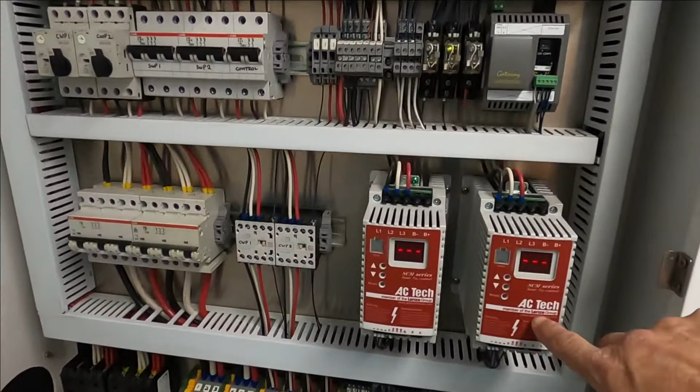Do a little upgrade to the system monitoring. Currently what it does is there are seawater pumps. See, there are seawater pump VFDs that control the speed of the seawater pumps, so it regulates the head pressure, or the high pressure if you will.

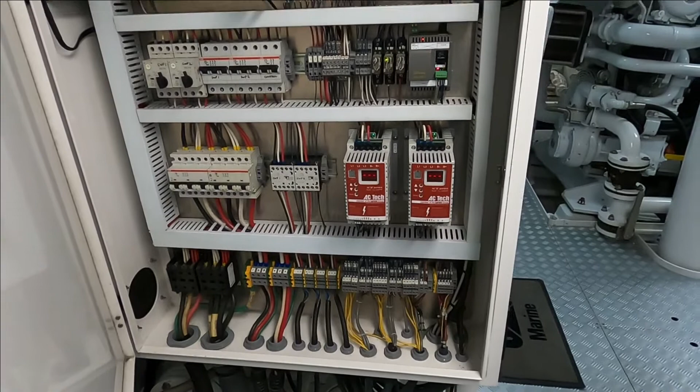So what I'm going to do is, well, the problem is if these things fault out for any reason, the system doesn't know it, and then it'll fault out on high pressure. So what I'm going to do is connect these up to the PLC to give us a warning to shut the system down as necessary.

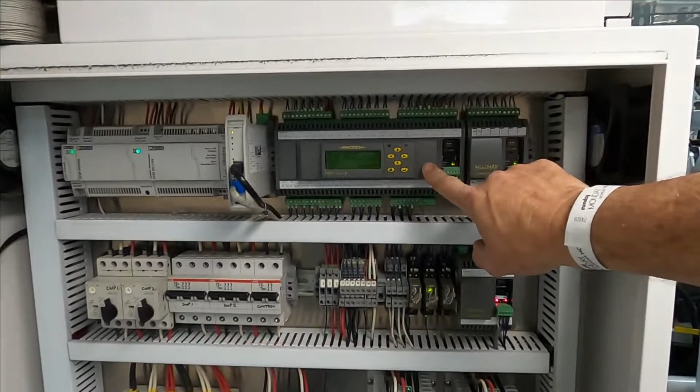So we're going to do an update on the chiller control system here. These are seawater pump VFDs. What they do is take a signal from the programmable logic controller, the PLC, that is monitoring the pressures of the compressors. When the pressure goes up, the seawater pump speed goes up. When the pressure goes down, the seawater pump speed goes down. Because we want to regulate it at a certain pressure to give us a certain temperature of the refrigerant.

Problem here is VFDs sometimes have an issue and they will fault out. So what I'm going to do is these fault relays, here's a fault relay output, fault relay output. I'm going to hook them up. See, we have a couple empty spaces right here. So when a seawater pump faults out, the PLC notices that and will shut that compressor off instead of shutting off on high pressure.

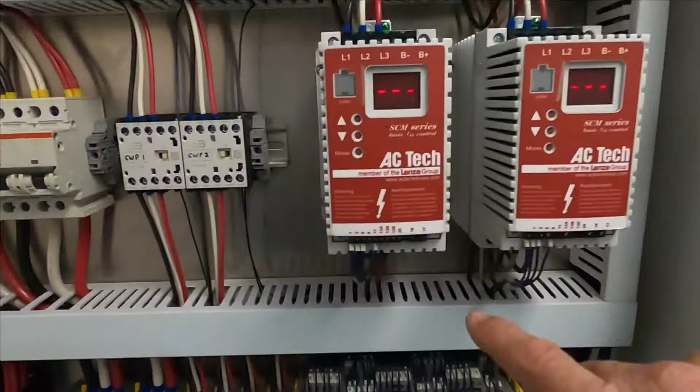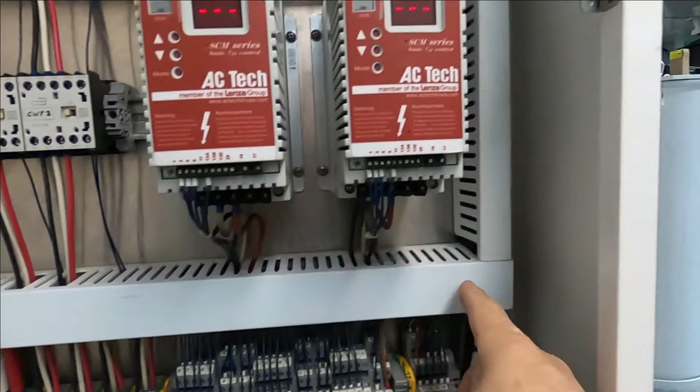So what I'm going to do is, from these two, I've got to program them to energize that relay, and run wires along the cable chase here and into the PLC.

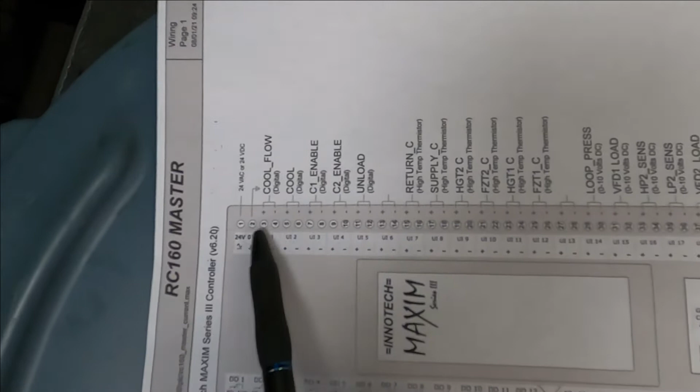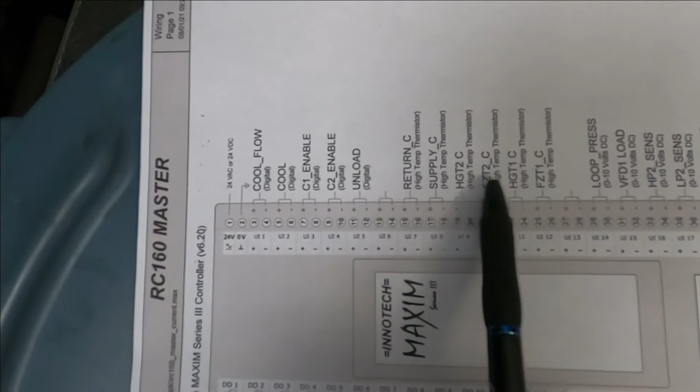So here's the old configuration. We've got inputs all along here. As you can see, we have an empty one here and an empty one there. Well, the way this system works, I can't just put them there and there. I have to move all of these over to one spot. And that will open up these two. Or if that one's already open, it'll open up this one.

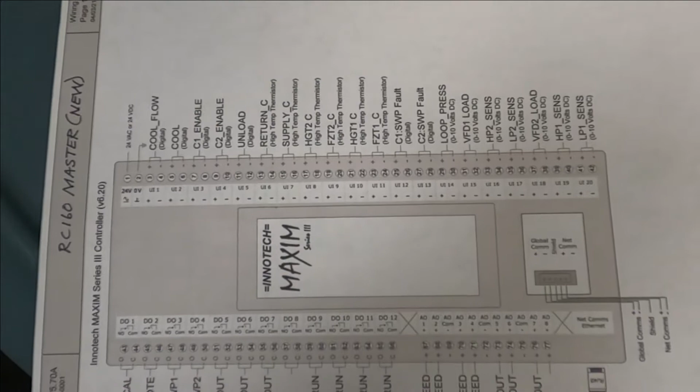Here is the new configuration. As you can see right here, it's the seawater pump monitoring. It's just the way this Maxim system works. So it will require a little programming change, which has already been done. I just need to upload it into the PLC.

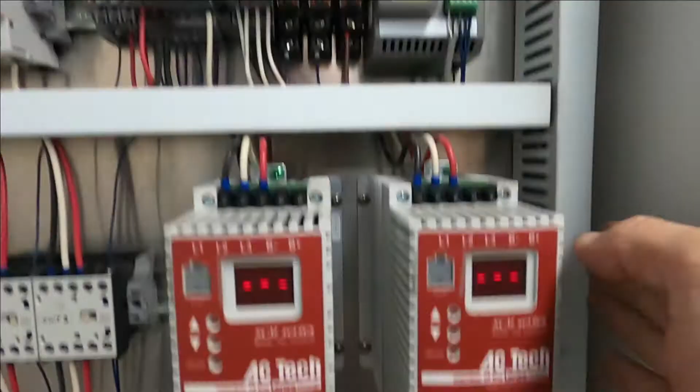Alright, so I have these two wires ready to terminate onto those two terminals. I have these two wires ready to terminate on those two. I ran them up that wire chase, and they are coming out pretty much from where I need them. Alright, so I have those two terminated with ferrules. I have those two terminated with ferrules. Covers back on for those two. In theory, I can put that cover on.

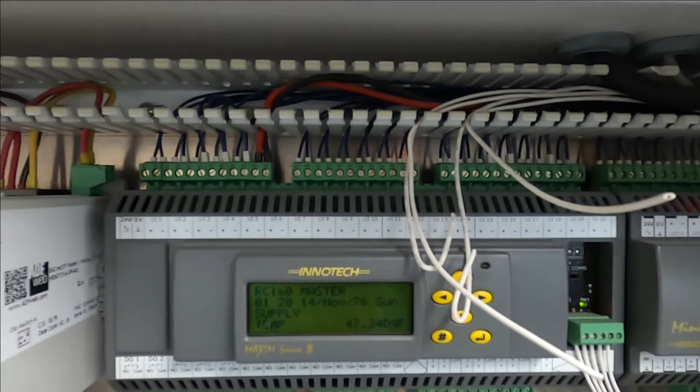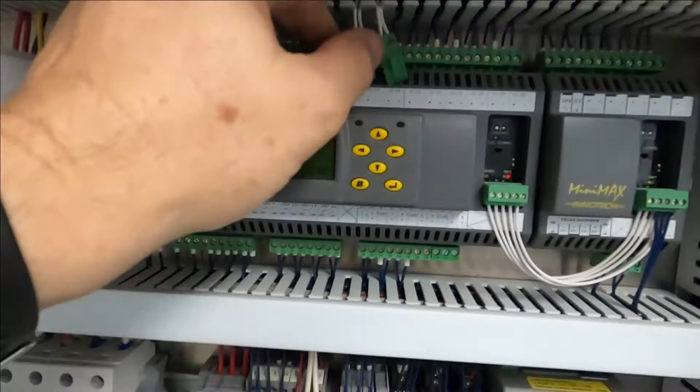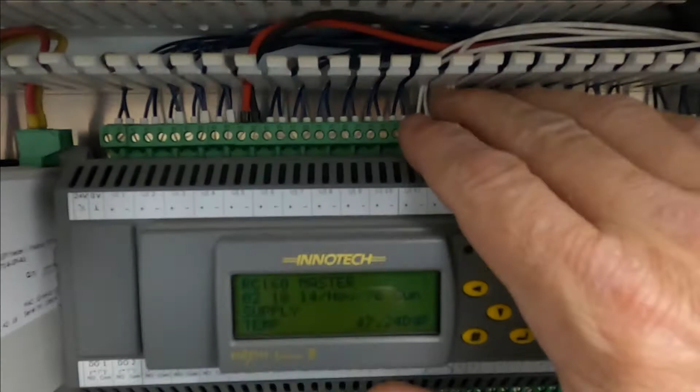Problem is, I need two of those terminal blocks. See, there and there. I need to go back to the shop and get some. Bummer. I moved all those over as I said I needed to. Now I've just got to put these two in. Okay, so I did. I moved all the ones over as I needed to. Remember, there was an empty spot right there. So I moved those 6 over, plugged those two guys in.

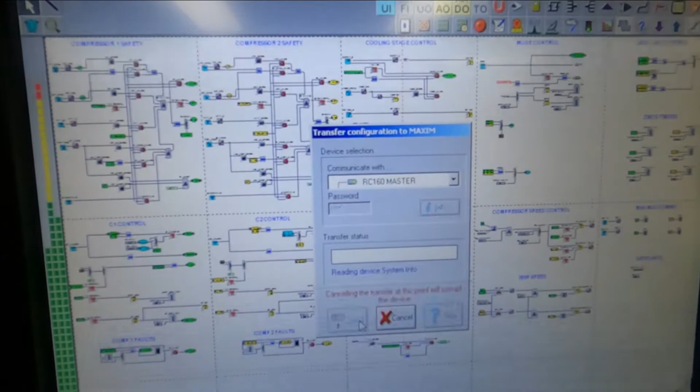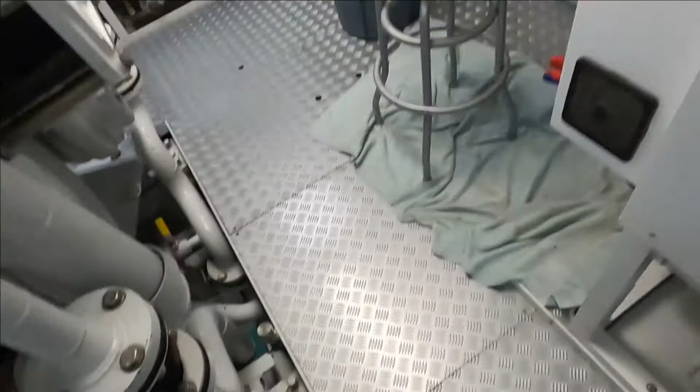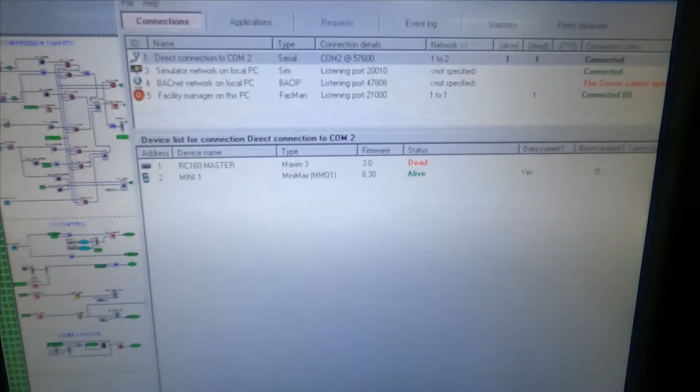Now it's time to upload the new config. So we come here to communicate, transfer to Maxim. Already have the password in. Send. Okay, so now it's writing data to the device. Alright, successful. Hit OK. Reset. OK. OK. Now, let's see, we got halted. Come on. There we go. Now it's alive. It's alive. Let's get that out of the way.

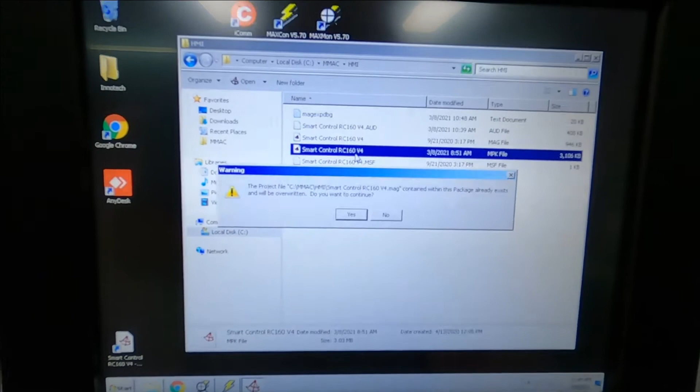Now we need to, here, let's see. HMI. Yep, I want to overwrite. Yes, I want to do all that. Now it's going to tell me I couldn't, which is fine. System is firing up. Chill water pump just fired up. Just make sure everything's good. Setting. Pump 2. Alright, I already transferred the run times.

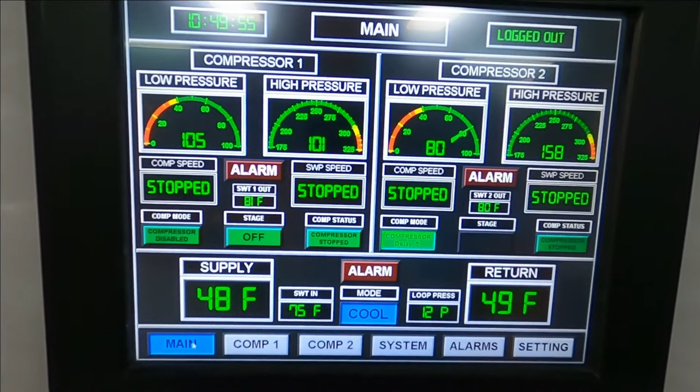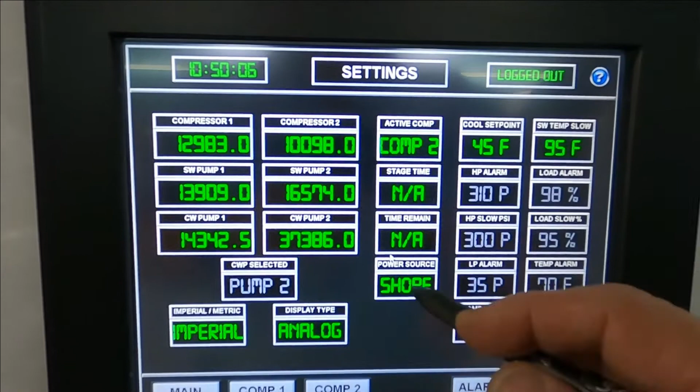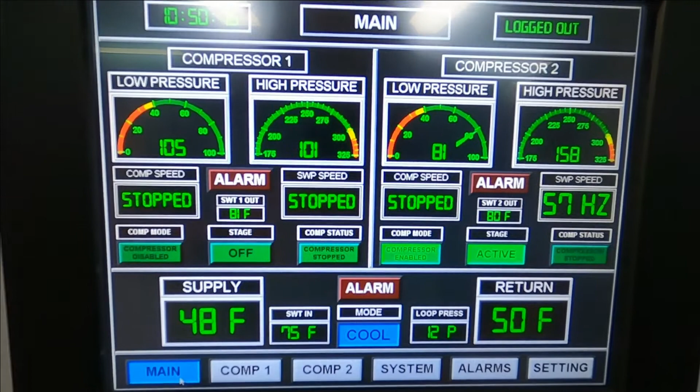That power source means that when it's on shore power, that can enable both compressors, but only one will run. There we go. Let's monitor this. Alright, she's running. 40 hertz for the time being. It will speed up. There it is. Alright, wanted to do 49. We're good. Seawater pump because of the head pressure so low, because we got some cold water coming in. We're good there.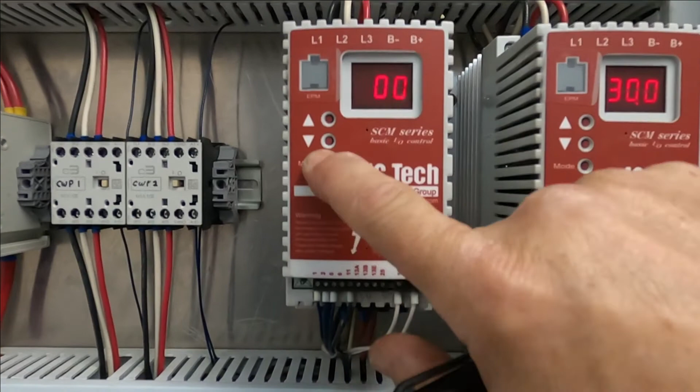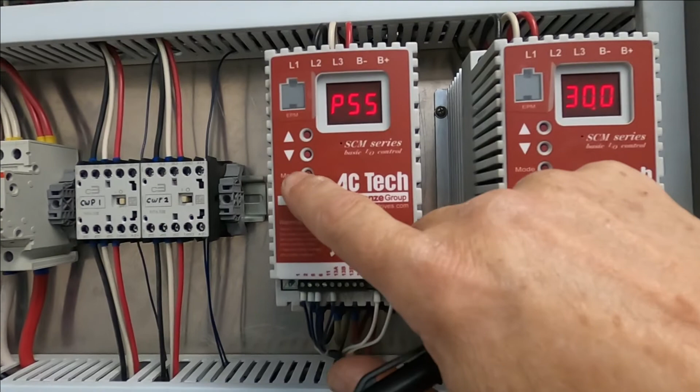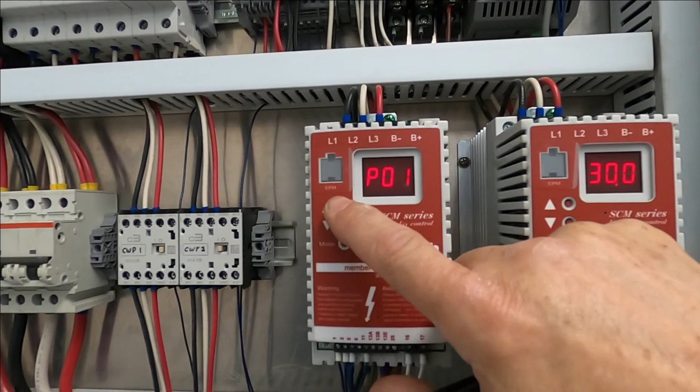Now, I've actually got to program these. So hit mode. Down to 6. For some reason the password is set up on this. It's 225. Typical for these AC techs that they no longer use. Faster, let's see. 225. Alright, good. So P06.